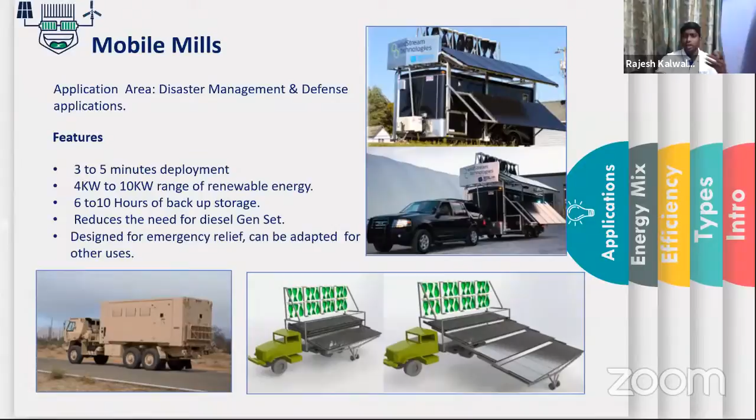Even if you can see in the lower picture, it is for the defense requirement. So it is also retractable type, and you simply put it somewhere and use it. Mainly in defense, I will show you some pictures in a later slide. You will understand in a better way.

This is in the commercial advertisement. So generally, not only in Saudi, or not only in Middle East, or in Europe, or in India, generally the customer commercial advertising customers will pay lot of pennies per unit. Even in India, I think even at our location also, close to 17 to 20 rupees they pay per unit basis. So as they are available at very high location, if you can place this kind of system, then their expenditure will drastically come down. So that is also one advantage with them.

And as I said, as they are paying with very premium, their return on investment also is very close to 1 or 1.5 years, something like that. So that is also one advantage. This is also one application for hybrid power plants.

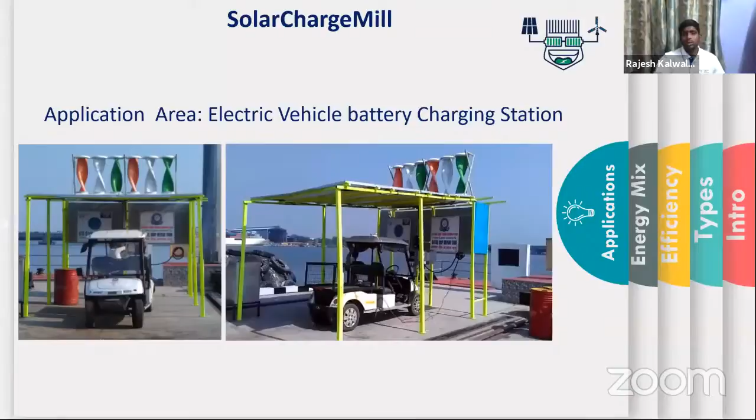And the next application area is fishing and transporter boats. See, generally we never think that why do we require a hybrid power plant or a solar or a wind power plant for ships, because generally every ship has got their diesel generator. But Windstream Technologies have taken a forward step in finding the different areas of application. So they found that these ships are consuming maximum amount of diesel. Of course, they even run on the diesel. So to reduce the diesel consumption, they can go for a hybrid power plant.

Even if they can go for solar, space is the main constraint for them, since they are running in the sea, ocean, or river. There you will definitely have good resources of wind and solar, especially wind. So when you have good wind resource, why don't we implement a wind turbine at that place, and why don't we reduce the diesel consumption?

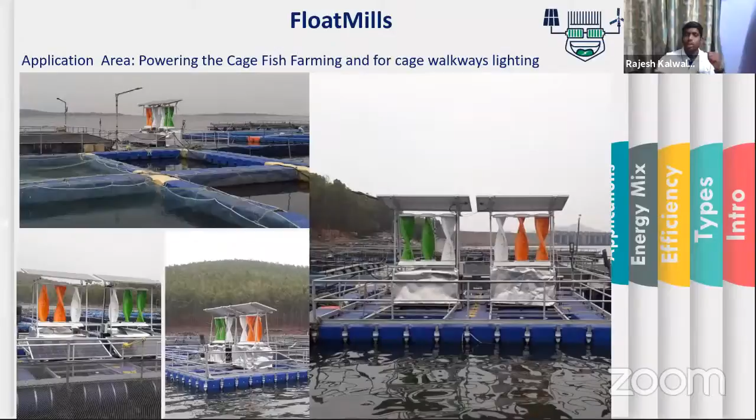Moreover, generally in this kind of system, thefting of fishes can happen. To avoid both issues, we have given this floating solution, where you can see in the first picture, street light kind of arrangements give lighting in the night time. With lighting arrangement, we can at least try to avoid the thefting issue. And feeding in the night time also gives more yield within a short time. We even monitor the power plant remotely, and if anything goes off we can operate it. So we have monitoring and controlling systems as well.

And this is, if you can see the surroundings of it, it is very open and near to the sea. It is one of the resorts we have implemented, and there they have got their ice factory.

In Lakshadweep, they use 100% diesel. Let's say 2 or 3 megawatts of diesel generators are available, and the total island uses only that diesel generator. If anything happens to the diesel generator, they will be residing in a dark condition. So just to have backup, reduce diesel consumption and reduce pollution, this is the kind of solution we have given.

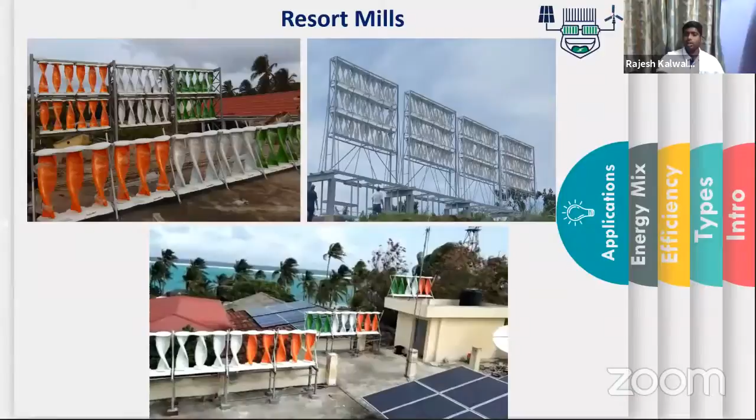And if you can see this, scalable with changing needs - it means the product can be designed from small scale to larger scale, and it's useful for both off-grid and on-grid applications.

So we have advantages like more power - meaning in less space you get more power - more reliable as you have multiple resources, and improved generation stability, as we discussed. It's also highly scalable, as I said you can design the product from 1 kilowatt to megawatt, and it allows fast installation since it's designed with very specific design practices. That is one advantage.

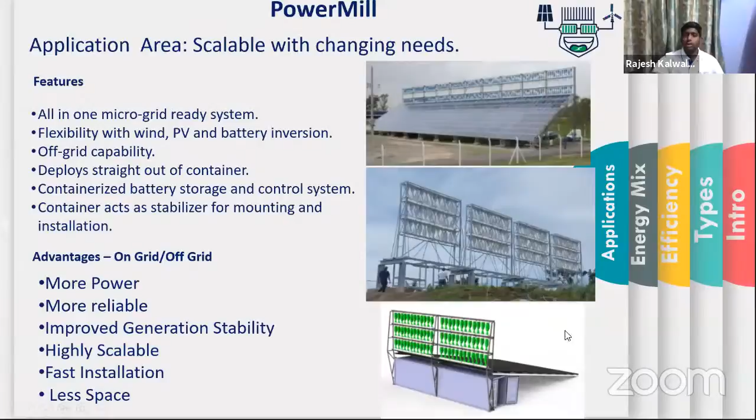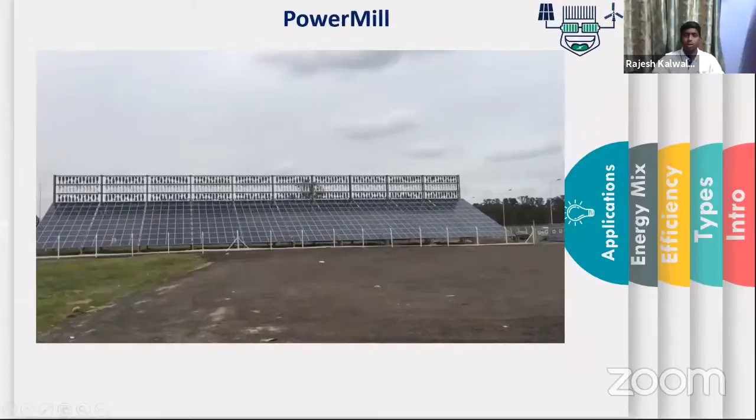The next slide shows one of the 800 kilowatt utility scale projects - a very beautiful installation. You can see the highways, and there are no other disturbances, so you can expect minimum generation loss from this kind of power plant.

Again, this is also one kind of installation.

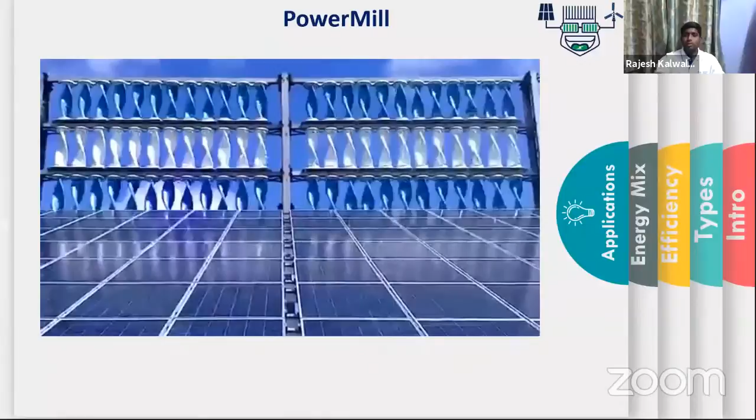And transportation of diesel is an issue. When operating a diesel generator and transferring power from one place to another over a longer distance, there will definitely be some voltage drop, and with voltage drop there will be power loss. So we have many bottlenecks with respect to power distribution in this kind of area.

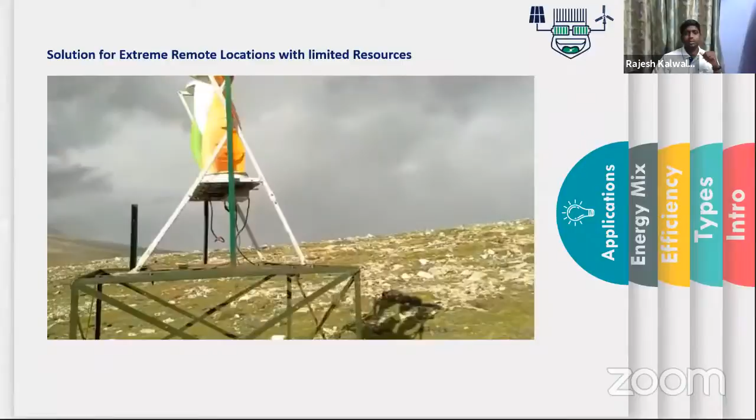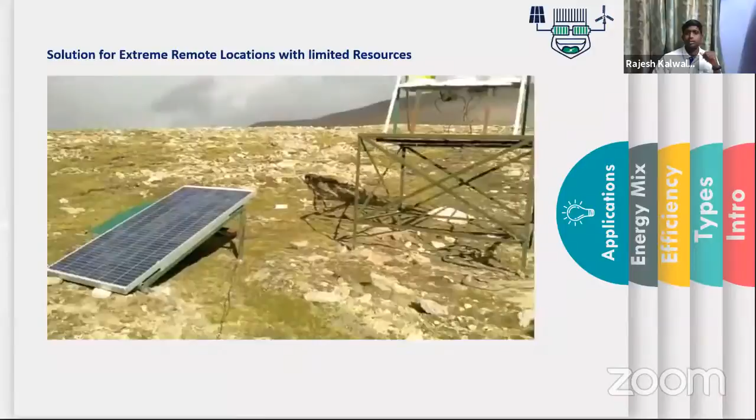If you see this video, you will understand that the area is at a hilly location. Of course, it is a defense location which is a border area, and you can see the falling of snow, and even some lighting, sun lighting.

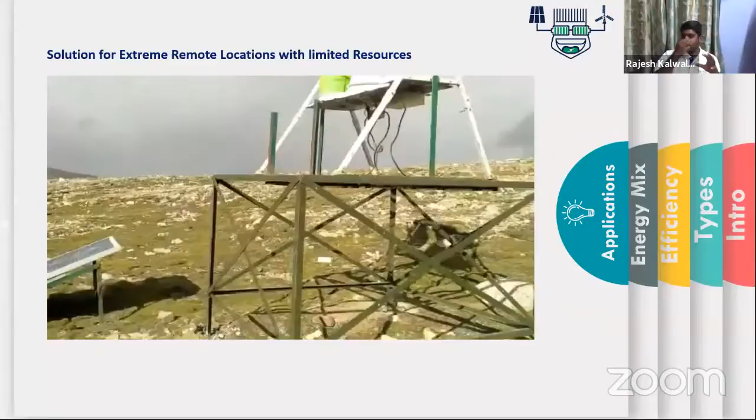So these kind of areas are like, you will get sunlight only for 1 hour or 1.5 hours in a day, though it is in India. Because most people don't know that we have locations of this kind, but we do have some locations in the border. It is a China border, I think.

You can see one person wearing all sweaters and all. It's a very cool place, but in that area when you have 1 or 2 hours of limited sun resource, it is very difficult to harvest the required power. But in this location you have one more advantage, that you have plenty of wind. So by adding both of them at one place, you can harvest a reliable power source.

With wind you have one more advantage, that in solar you have lower power generation when dust accumulates on the solar panel. But when it comes to wind, though you get dust accumulation or nothing, there will not be any change in the power generation. So as long as your turbines are rotating, definitely you will get your power generation. That is the beauty of the product.

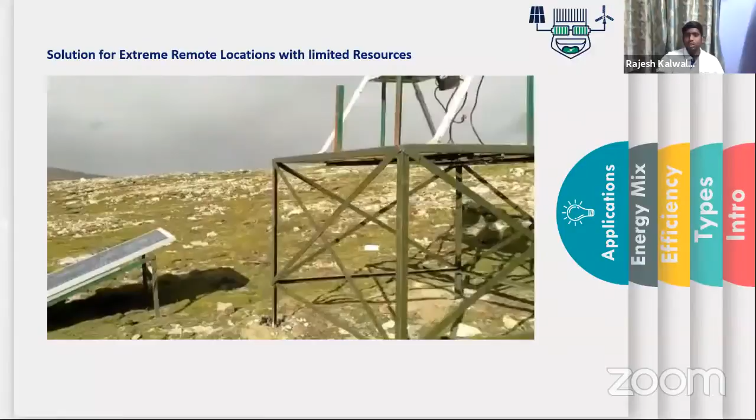And as it has got installed in a high location, definitely you will have more generation. Even you can see this installation as well. This is also available in the hilly areas. So you generally don't have access to conventional grid, and even it is very difficult to carry the diesel if you go with conventional methods. So there you can see the difference in utilization of these hybrid power plants and how really they are useful to the individual customers.

We are living in a very luxurious manner. We don't know what the people at the corners or borders are really having, these bottlenecks. They are working very hard to save us.

So if you see this picture, on the left hand side, maybe it looks like turbines are not rotating, but it is not that they are not rotating. They are rotating at very high speed. Your camera is not able to capture them. So that's how you look at this picture. It means that in hilly areas you can have very good wind potential.

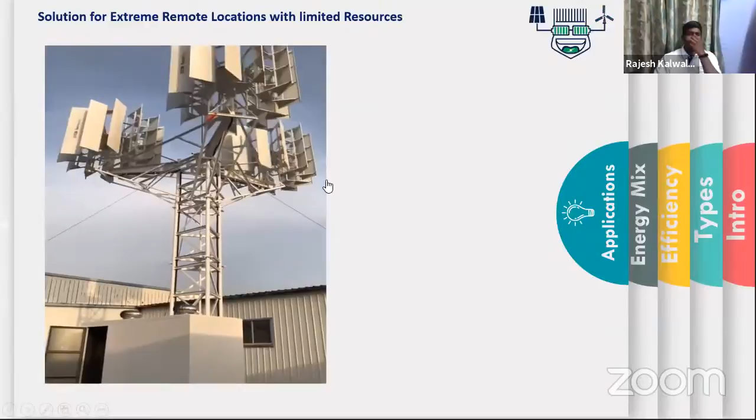This is a conventional model of wind turbine. You can see this is one model. This is a vertical axis wind turbine. Generally, for extreme locations, we generally have this kind of wind turbines. But of course, it is only the wind turbine, there is no addition of solar.

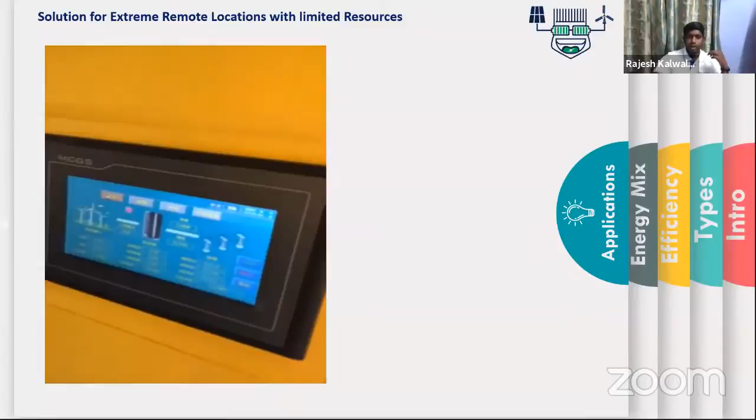And in the next slide, you can see another model which gives us a combination of both wind and solar, which is an additional benefit to the customer.

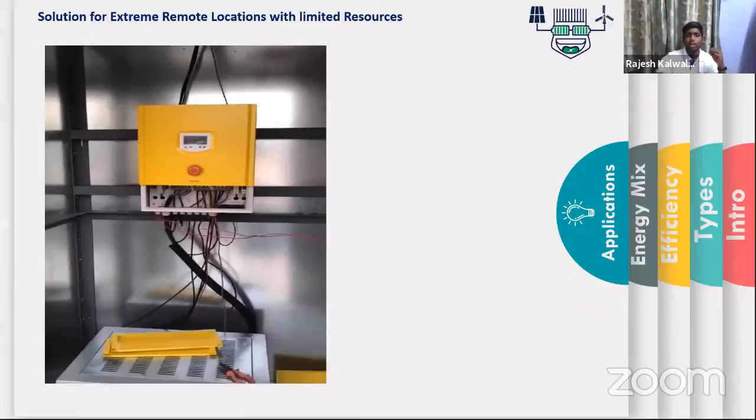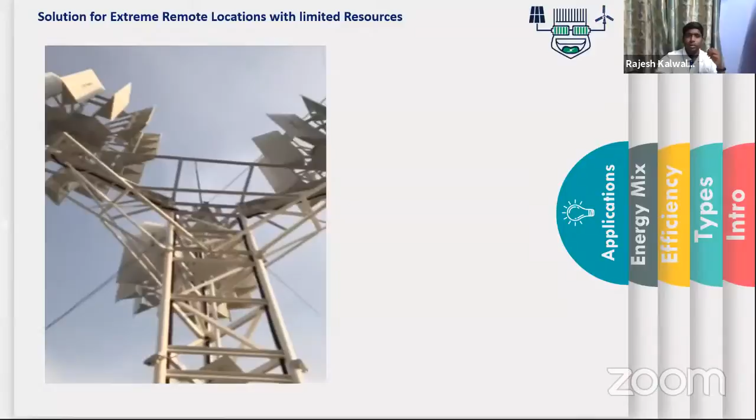This is the newly developed model. Of course, it has not got materialized into the market, but people are working to have both solar and wind in one place. Some people may raise the question: why has it got designed this way, because when they are rotating, there is a chance of shadow. Yes, of course you get some shadow.

But generally what happens in the design criteria is, when the resource is required at one place - because you are sitting in a city where you don't require this much power resource, as everything has already got established - but for a remote location, at least we consider that something is better than nothing. The same principle, everybody thinks this way in developing a product. So in that case, this kind of solution is definitely useful, because it takes lower space and it is generating from both resources. That is also one advantage.

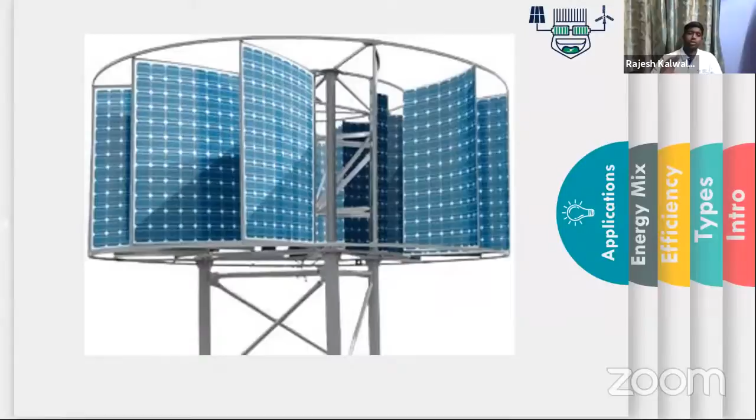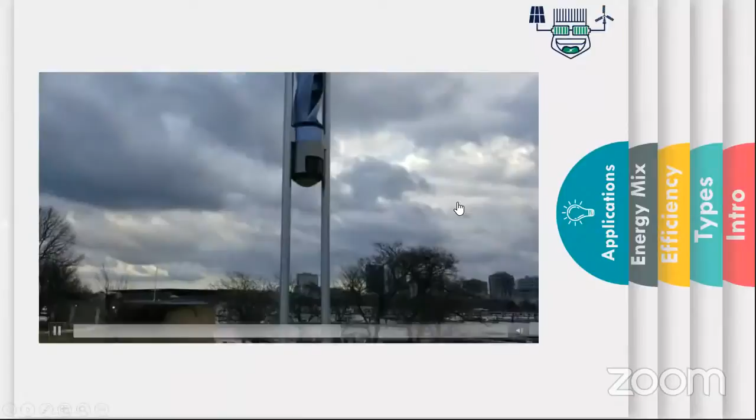And you can see one more kind of wind turbine with an added solar panel. It is established as a street light. One model you can see, and we can discuss more about this.

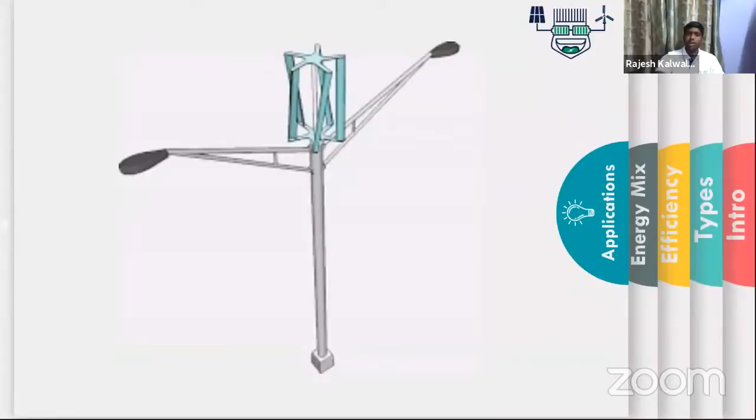And this is one model, a developed model. Of course, a lot of models need to get converted into practical applications, but people are putting efforts to develop different products. And this is a horizontal axis wind turbine with solar panel. But what happens with the horizontal axis is that they require taller towers, and they require strong support.

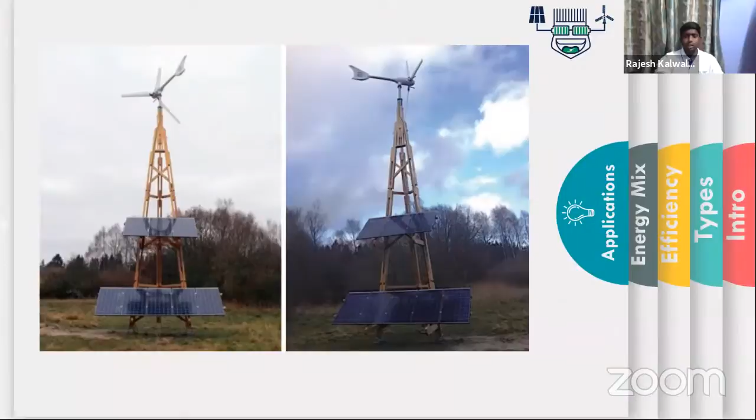This kind of arrangement is generally not suitable for rooftop installations. Rooftop installations generally go with vertical axis wind turbines. Of course, vertical axis wind turbines are available in lower capacity models, because for horizontal axis you can even get up to 5 megawatts, with poles reaching 120 meters in height. In vertical axis you may not get that much capacity, but since they are designed in a scalable manner, you can add more modules for more capacity and more energy generation to meet your demands. That's how it is designed, and most products follow this approach.

And this is also one model of installation with horizontal axis turbine.

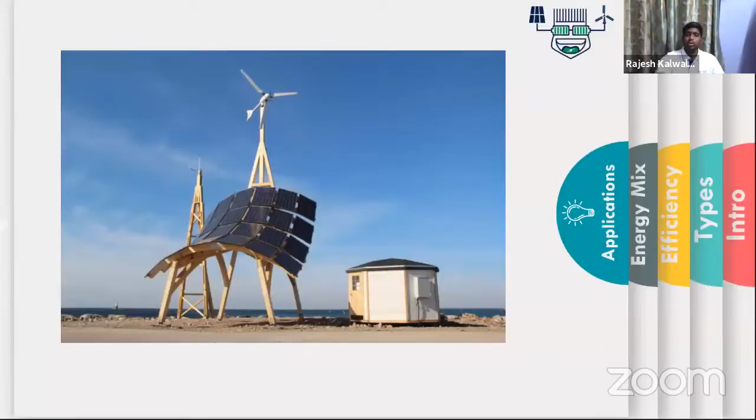In vertical axis, generally you have a 360 degree approach, so wind flowing in every direction doesn't matter, it will hit and through drag force or other methods try to rotate. But in horizontal axis you have a wind vane, so it automatically adjusts its direction to keep the turbine facing the wind, trying to harvest more power and generation.

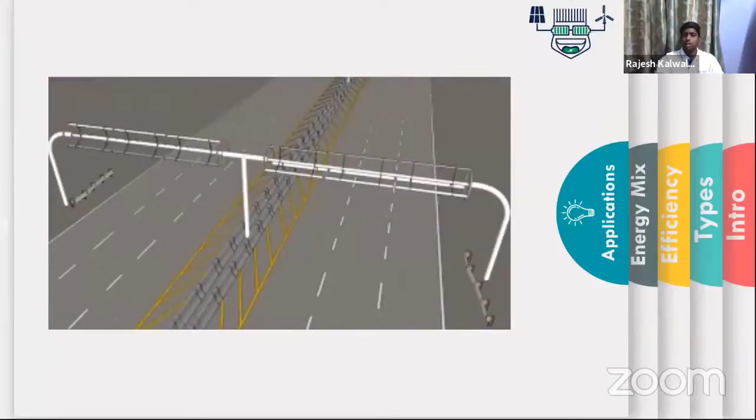This is one model, like when too many vehicles are passing through, there is a chance of wind hitting, by which you can generate some power. This is also one model people are going for as a solution.

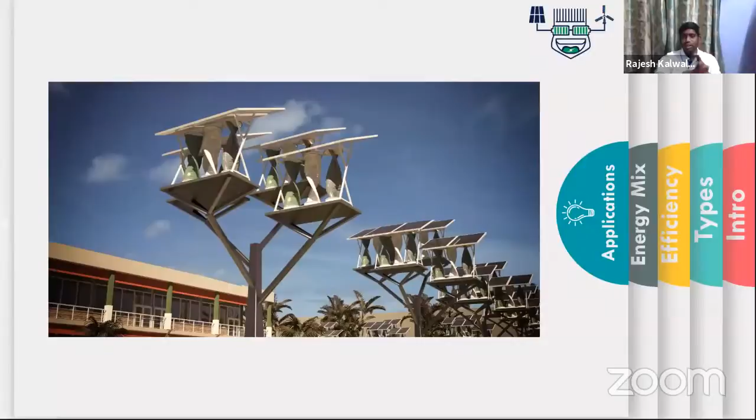Most people might have seen a solar tree. In the same way, the hybrid tree also has got a design, but of course it will take some time. People are making some steps in this direction, and this is one model where at one place you will have both solar and wind.

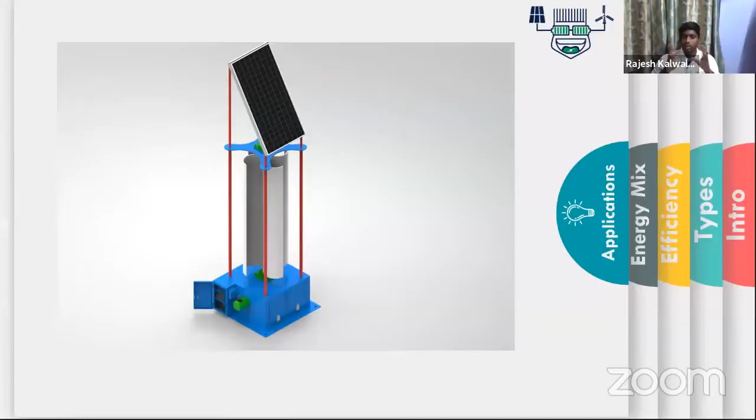Generally, this kind of arrangement comes with a direct drive system. Direct drive meaning that horizontal axis wind turbines are all equipped with a gear mechanism. When using gears, there will definitely be some frictional losses, and you need to maintain them, because every rotating part requires greasing or replacement. With a direct drive system, you definitely get higher efficiencies.

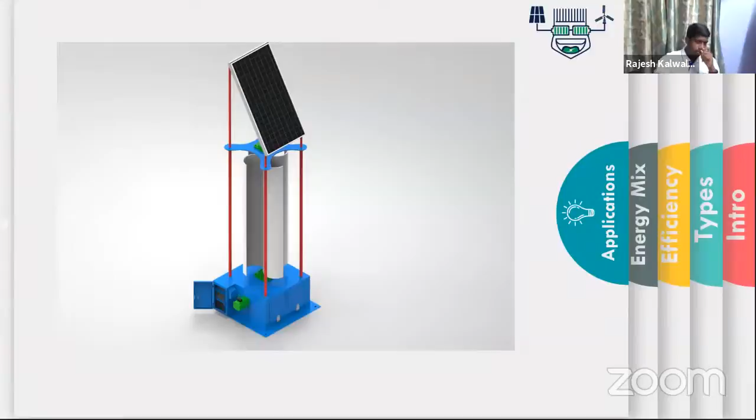As we discussed yesterday, people are using axial flux brushless DC type machines. They are very compact with higher energy density, and being direct brushless, your efficiency levels definitely improve. This box shows the inside as well as the rotating machine.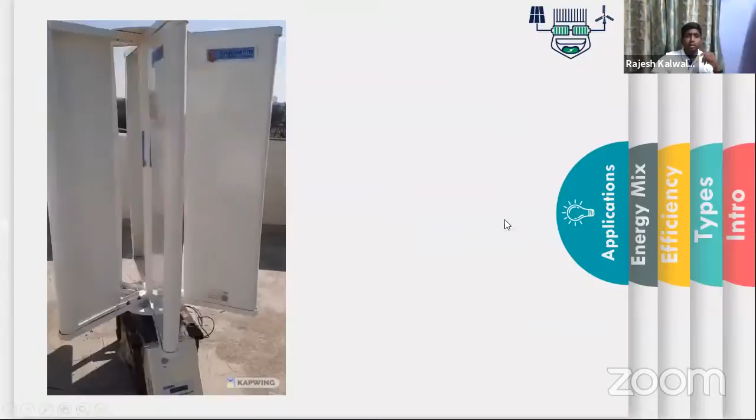And this is one model of a hybrid system where we have solar and wind together. You can design plants from 200 watts to 20 kilowatts with this model.

The advantage with vertical axis is that you can increase the height to increase capacity, whereas solar power plants generally require a lot of space. So in other ways it is very much useful in implementing.

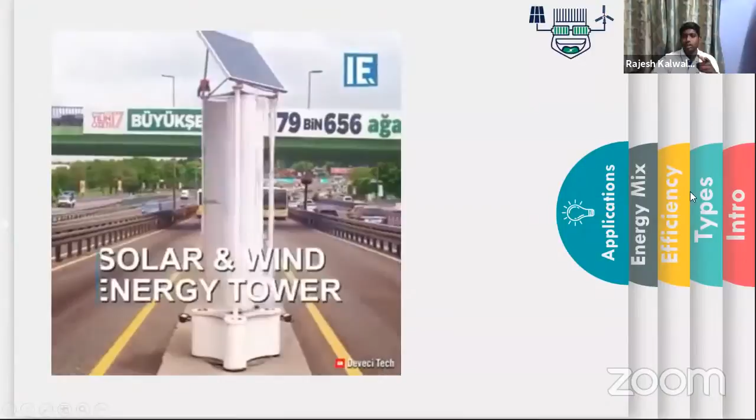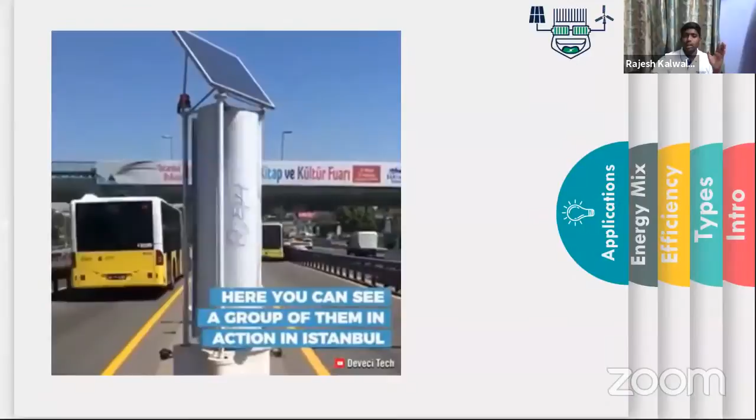This is one more application you can see on highways and at coastal areas. Nowadays people are coming up with kiosks in gardens or beach areas with this kind of arrangement. It stores energy in the battery, and if anyone requires it for emergency purposes, they can even charge their mobile phones, gadgets, or laptops. These are the new concepts people are deriving.

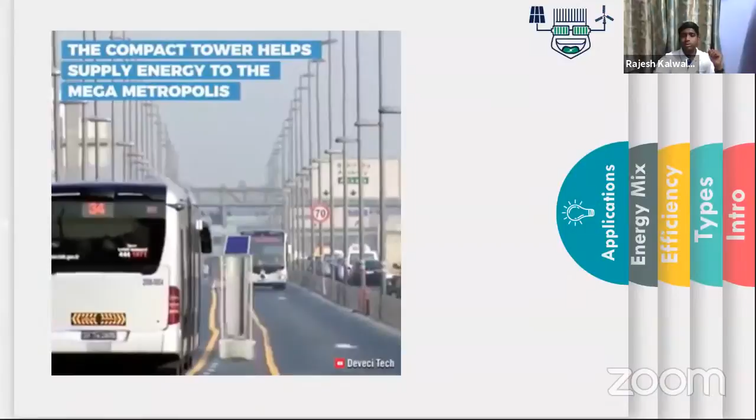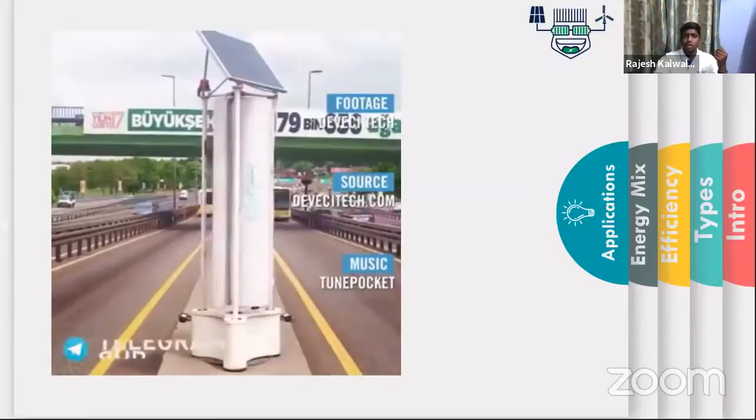And of course, as vehicles are moving, there will definitely be some wind, so we are using that on a free of cost basis. We only put some investment into the equipment, but it is for longer use.

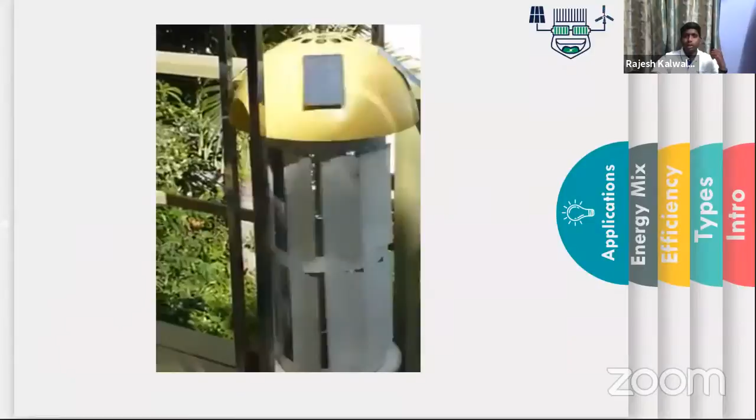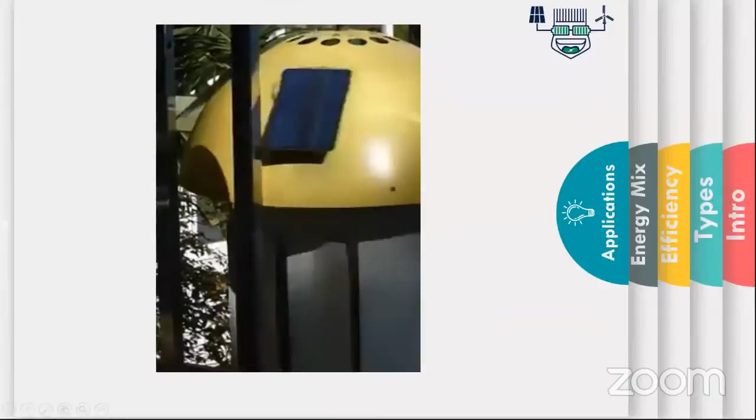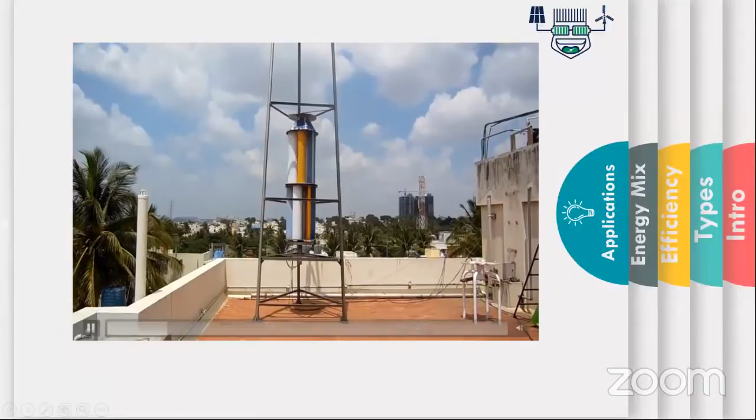This is also one type of wind turbine with solar and wind on top of a circle. You have solar panels, and again it is a wind turbine. These are the solar panels mounted on top of it. Maybe for small energy requirements, but when they do not have access to the grid, they may be using this kind of solution. This is also one type of vertical axis wind turbine, and even on top of the tower you can have a horizontal axis wind turbine. Here also you can see some small solar panels.

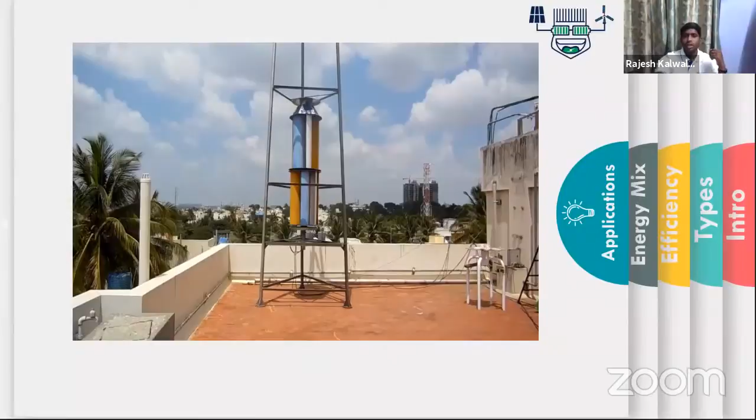This is one model again placed on a rooftop solution, and we have some more models like this.